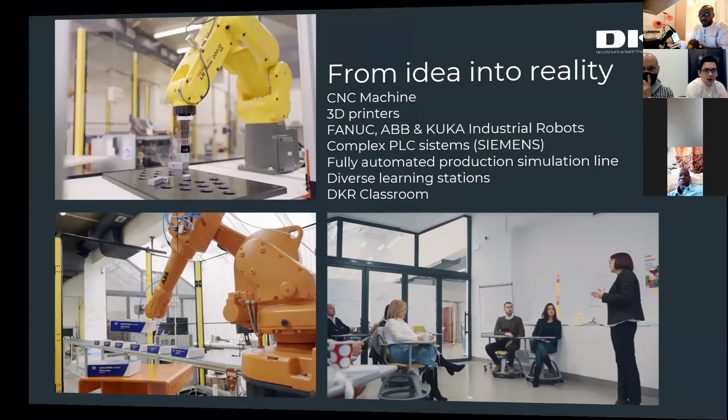Today's DKR lab is equipped with more than 9 industrial robots with different control systems such as FANUC, KUKA, or ABB. For those who don't know, those are manufacturers among the biggest world industrial robotics companies. FANUC is a Japanese company, KUKA is a German company, and ABB is a Swiss company — actually half Swiss and half from Sweden.

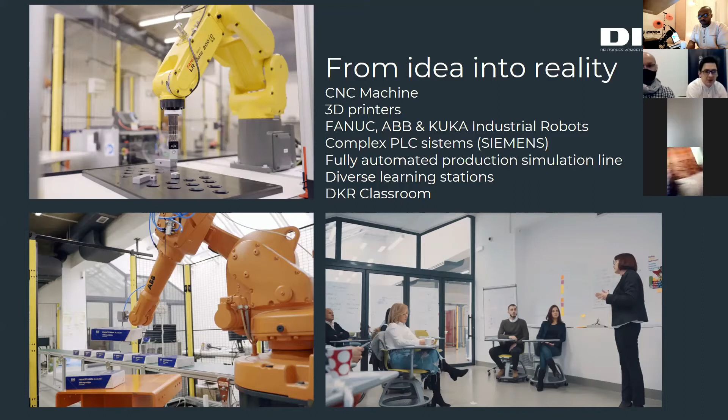Also, in our center we have a fully automated production line to simulate realistic production conditions, equipped with a CNC machining center, laser sensors, serving robots, measuring rings, welding and palletizing applications, all integrated into a complex Siemens control equipment setup. That makes us a unique center in this part of the world.

Now to some of today's points and the reasons why we are having this kind of event. Definitely, when you say robotics, Bosnia and Herzegovina is not the first place that comes to mind, but besides that, students from around the world are coming to DKR to learn about robotics firsthand with hands-on training in our center, with the support of our engineers.

In past years, we had students from Australia, Vietnam, Germany, India, Pakistan, New Zealand, USA, Serbia, Croatia, etc. All of them were coming to our center to learn about robotics first hand with hands-on trainings.

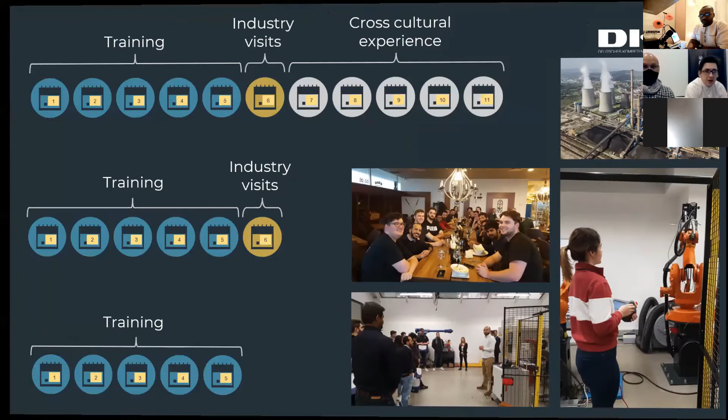And now, let's present you how a typical training in DKR looks like.

We offer a unique program, whereas you can learn programming and handling industrial robotics and automation, while in parallel developing crucial enterprise skills and making you highly employable.

Our program includes three different types of approach. First approach is training combined with industry visits and cross-cultural experience. What does that mean? That means that our country is known for our hard industry.

When you finish with your part of educational training in industrial robotics, you're capable to visit some of the biggest industry plants in our country and to see the moment and how industrial robotics is applied in industry.

And after that, it is possible to make some kind of cross-cultural experience in our country that includes visiting some of the most popular touristic places in our country.

Other part of the training could be industry visits combined with the training, and the last part could be only having the training in our country, which is a 5 days long training.

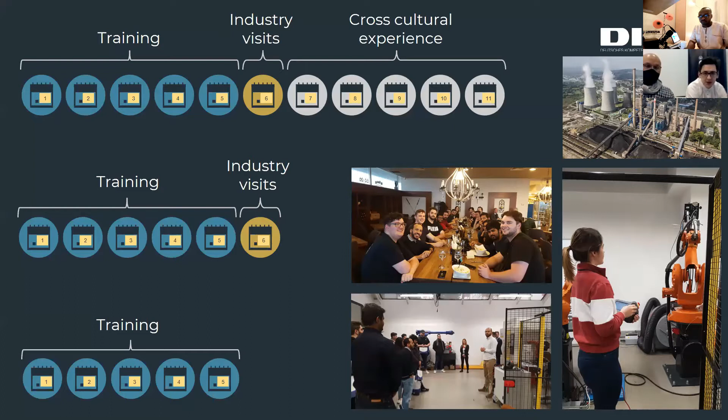You are eligible to choose, when you come to Bosnia and Herzegovina, basic or advanced level of programming, which is most suitable for you and your interests and needs.

So, as I said, we base our trainings on 3 of the most popular industrial robot manufacturers. Based on your interests and your needs, it is possible for you to choose in which field of industrial automation you are willing to improve.

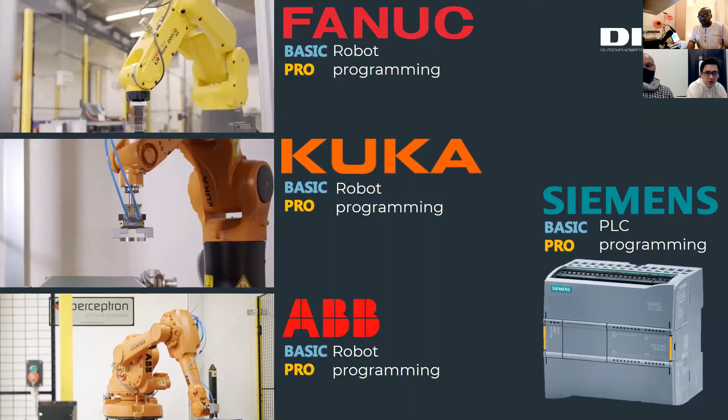But unfortunately, due to the world's pandemic and travel restrictions, we are at the moment unable to predict how the situation will unfold. Our country itself is not in a good situation, just like Germany or our other neighbor countries and the whole Europe in general.

Definitely the conclusion is that health must not be risked in any way. At this moment, we cannot guarantee health safety of any visitor of our country. Especially, we cannot guarantee health treatment in case of an infection for tourists or visitors to our country. So travel is not recommended, most likely until summer of 2021, and even that is questionable.

But for you not to wonder why we are telling you all of this about our industrial robotics, in terms of our personal commitment to pandemic solutions and commitment to fight with casualties of pandemic, we have developed special virtual robotic classes with an option for users to choose their learning path and to navigate at their own pace of learning.

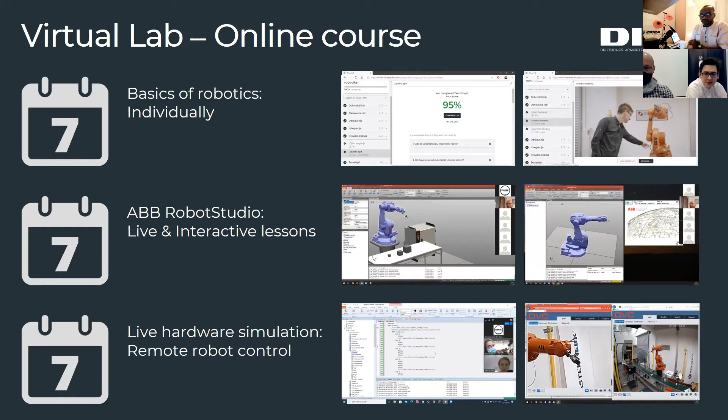Laboratory, the internet portal, is on this video that we will show you, and maybe our professor can tell you a little more about what's happening on the screen.

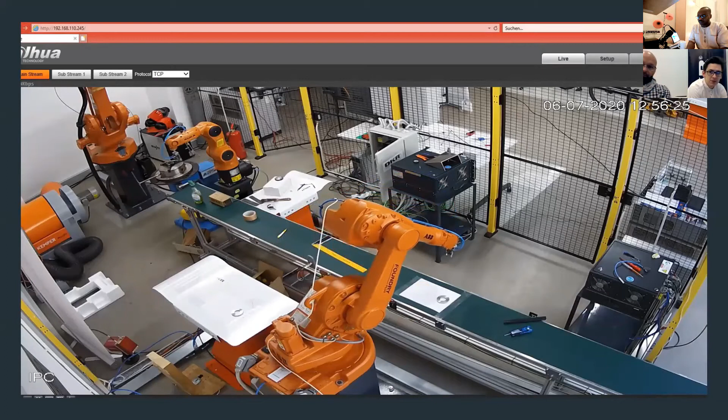Basically the students are working with me online in RobotStudio, which is the ABB Robot platform for offline programming. They are upgrading their knowledge, and they have a home task where they need to make a simple pick and place application. After that, I check the code and simulation they made at home, and once I see the code is okay and the application is good, we try that code on real equipment. As you can see from this video, the same movement is shown in the RobotStudio simulation and in the real environment. So basically, everything you can try or learn offline, you then have the opportunity to test on real equipment online.

In this pandemic time, this is somehow the best way that you can learn and avoid getting infected.

Basically, as you can see, it's looking good. We are planning to mount more cameras. One camera will be on top of the 6-axis, and you will actually be able to see when the robot gripper is manipulating the part that needs to be picked and placed.

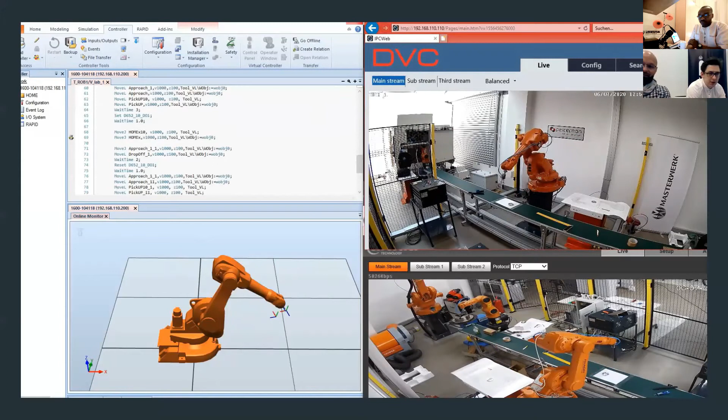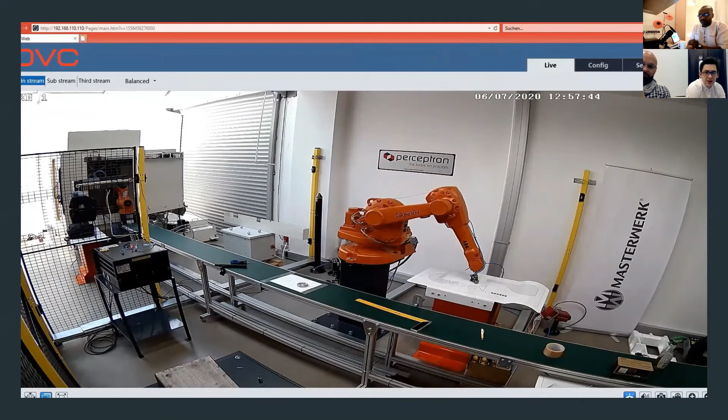On the left side of the screen is your simulation environment, and on the right side of the screen you see a live video transfer. For the moment, this kind of course is only dedicated to ABB robots because of the simulation environment.

But in the future, hopefully, we will try to design the course for other robot manufacturers like KUKA or FANUC. We are using ABB robot because until the end of the year they are offering their Robot Studio license for free, and that's the main reason we are using ABB for now.

But anyhow, you have a month of free license for Robot Studio, so within a period of one month you can finish your online course.

Okay, that would be a simple presentation of how the digital course looks like.

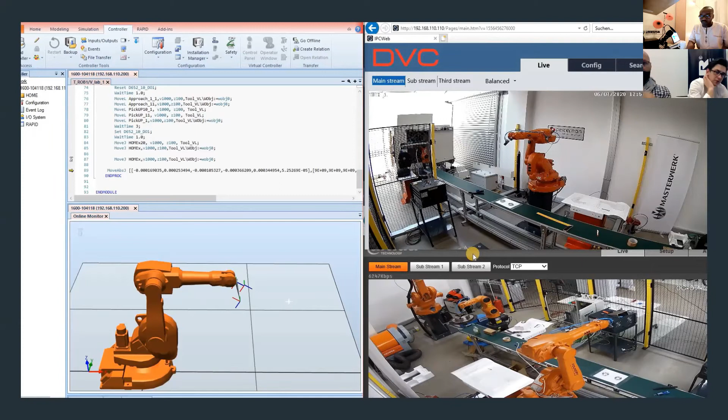So if someone is interested in our course, here's a timeline of the first available dates of this educational course. The deadline for application submission would be the 26th of December this year, and the deadline for tuition payment would be the 8th of January 2021. The start date of the course would be the 15th of January 2021, and between the 8th and 15th of January you will have continuous customer support with us to prepare you for the course. The end date would be the 6th of February.

Sorry, can someone mute your mic, please? No, you can mute it from your end. Yeah, I'm trying to do that. Thank you, sorry guys for that. No, everything is okay.

Are you still seeing the screen? Yes, we are still on the screen. Please do go ahead.

At the end of the course, you are awarded a verified bilingual certificate in English and German for completing the course, and after the course you are able to program, manipulate, and create applications with ABB robots.

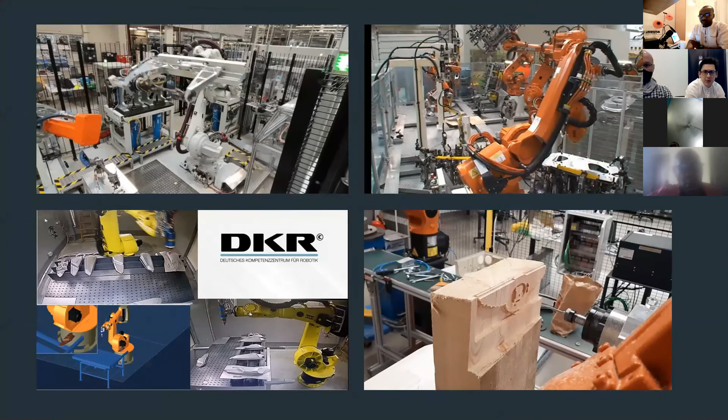And for the end, because you wanted to discuss today about our services in industry, but we didn't want to mix it a lot with our educational path. But for the end, here's just quick examples of our robots implemented in industry.

In the top part of the video, on the left and right corner, you can see robots in automotive industry doing machine tending and pick and place solutions on automotive parts. On the bottom left corner, you can see the robot implementing laser cutting, and on the bottom right corner, a robot doing robot milling applications.

Professor, these two upper applications are examples from our projects done in Germany, where we are doing optimization of processing. These two videos from down, one is from our center, and the other one is from the factory here nearby, where we implemented this laser cutting for our customers, as you can see in this bottom left video.